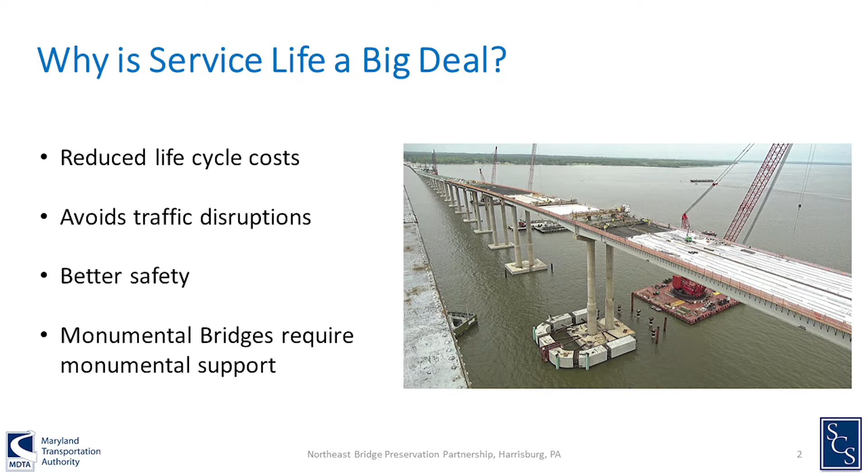So why is service life design a big deal? What are we talking about here? I think everybody recognizes that major rehabilitation and preservation projects often come with major impacts to the public and costs in terms of user costs. And ultimately, all of us should be focused on bridge safety. You know, when major incidents happen, what kind of negative reputational issues come with it. So designs focused on extending service life help us provide better conditions for longer, which ultimately gives us a greater degree of confidence in the safety of the assets.

One of the things we'll talk about in this presentation is what do you actually get when you design a bridge by code. Some folks may not realize what service life means in terms of their design. But given the amount of effort that often goes into designing monumental bridges, oftentimes they require monumental support, from elected officials and financing. So service life is a really important thing when you're talking about those really exceptional projects.

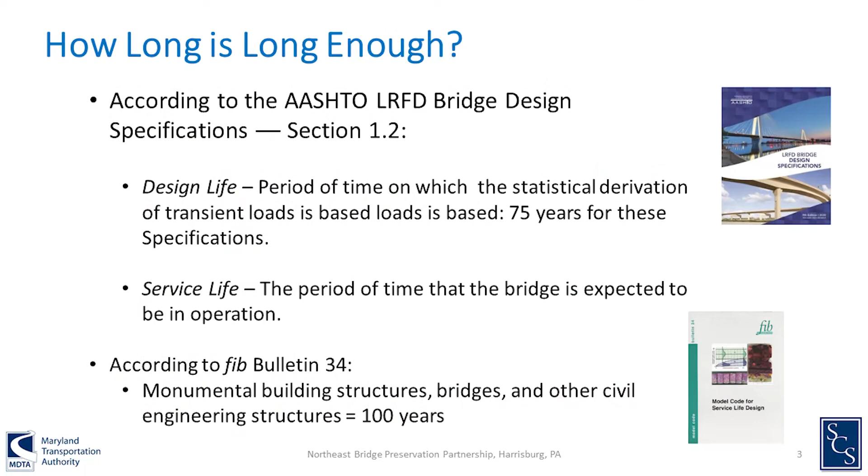So how long is long enough? A lot of times our presentation title initially was really focused on a 100-year service life. That's kind of a buzz term today. But the AASHTO LRFD code that most of us use has a 75-year design life. There's different terminology here: design life and service life. Design life is really the amount of time that the code says the loading used for this design will still apply.

It's not really a measure of durability. In terms of durability, that's where you get into service life, and there's not really a prescribed service life. Service life comes in different measurements. You can have a technical service life, which is when do you reach a point where your service is unacceptable - that could be cracking or delamination, whatever safety issue you have. You can have a functional service life where the traffic is too bad on the structure and it needs to be replaced because you can't live with that daily. And then an economical service life - do you have to make so many costly repairs and investments in a structure that it would really just be cheaper to replace it?

So service life design has a lot of different measures that are important to consider. I would say many folks, unless you put intentional thought into it, probably don't actually know what your actual service life is. What did we used to get? Anybody who designed with the AASHTO standard specifications may not realize it, but the design life, what the loads were designed for, was only 50 years. And the service life was really designed primarily around things like crack control and clear cover - those types of deemed-to-satisfy criteria in the code. So there was no specific service life requirement specified for bridge structures directly in the design.

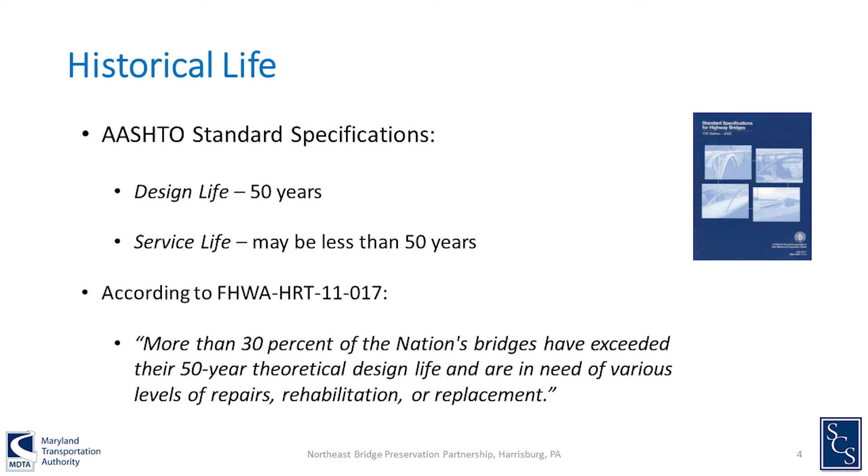Federal Highway has indicated that more than 30% of the bridges in the country have exceeded their theoretical design life, that 50-year measure. In terms of Maryland, I did at one point have a slide for the nation, but found that the data was very similar to Maryland. Ultimately, most of the bridges around the country were built around when the Federal Aid Highway Act passed, which was 66 years ago. So many bridges have already exceeded that theoretical 50-year mark.

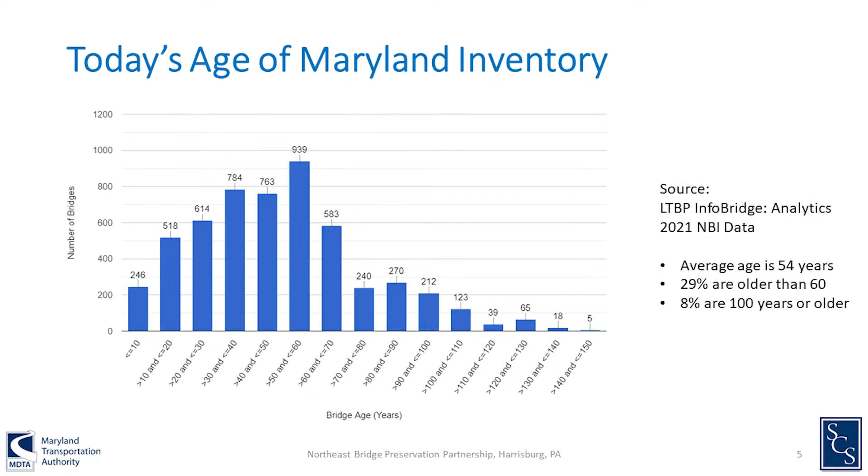And if you look at the age of bridge structures, most bridges do not make it to 100 years - most are 60 years or less. I noted that in my last slide, the average bridge age was 54 in Maryland, but you can also do certain treatments, and this aligns with deck replacements. We see from the NBIS, National Academy of Science, published some deterioration models on what you should typically expect in terms of decks.

You also see that 50-year number is pretty common—bridges will often have deck replacements in that 40 to 60-year time frame, most likely driven by using a standard design. Many bridge owners operate in a worst-first mentality, focusing on addressing their most critical condition-based needs, which drives them to large major rehabilitation projects.

But as we heard from earlier presentations today, making incremental investments over time is one strategy to extend the life of structures. You could also choose to do no preservation on a bridge, which tends to have the lowest service life—just a straight decline from good to fair to poor condition.

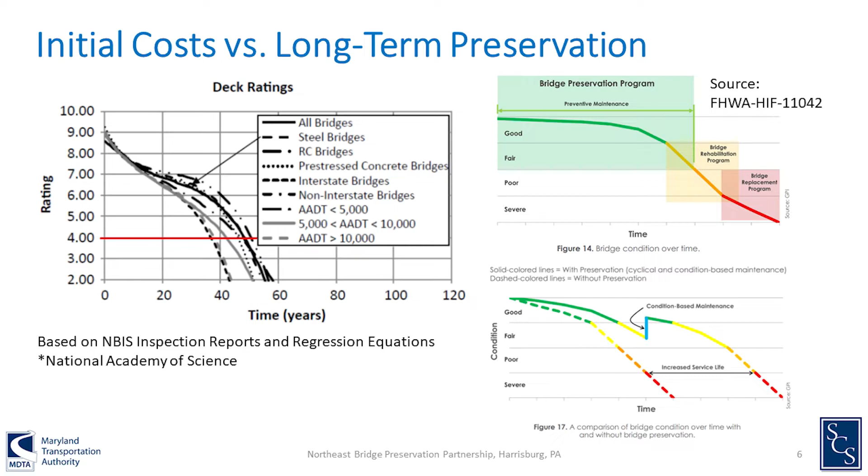But is there a way, using intelligent upfront design, to shift that curve—doing less preservation but making initial investments that allow for a longer service life without needing major condition-based investment down the road? If you look at design guides out there, there are really two major strategies to achieve service life design.

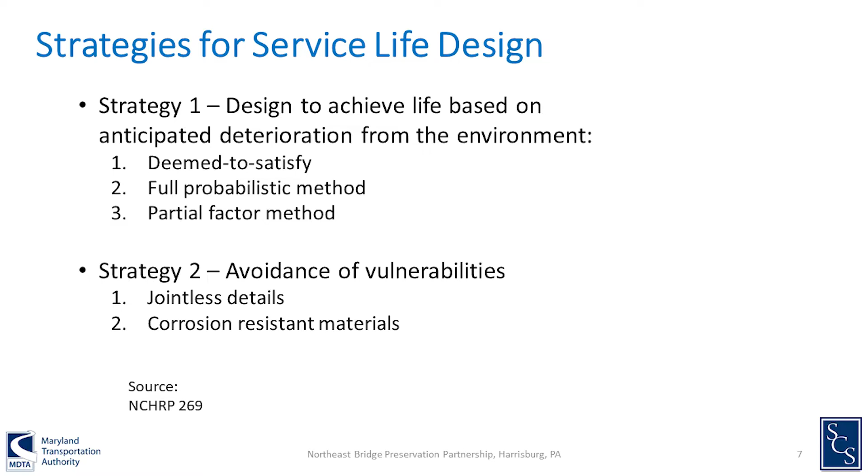One strategy is based on trying to avoid deterioration, set up with either a deemed-to-satisfy criteria—minimum covers and criteria in your design that allow you to avoid certain conditions—or a more tailored design for your specific conditions, which can be probabilistic or partially probabilistic.

Strategy two involves making heavier investments that give greater assurance you've avoided vulnerabilities. For example, you can pay upfront money to put in stainless steel reinforcing, and most studies show stainless steel reinforcing is inert enough that it typically lasts longer than 100 years. But it costs more.

So do you want to do that everywhere? Likewise, you can invest more in jointless details that are more costly but help completely separate your bearing lines and superstructure from drainage areas, helping you avoid that vulnerability entirely.

Do you want to make a lot of investment in having engineers design specifically for your conditions? Or do you want to get closer to that avoiding strategy, paying a little more in construction for greater assurances with materials?

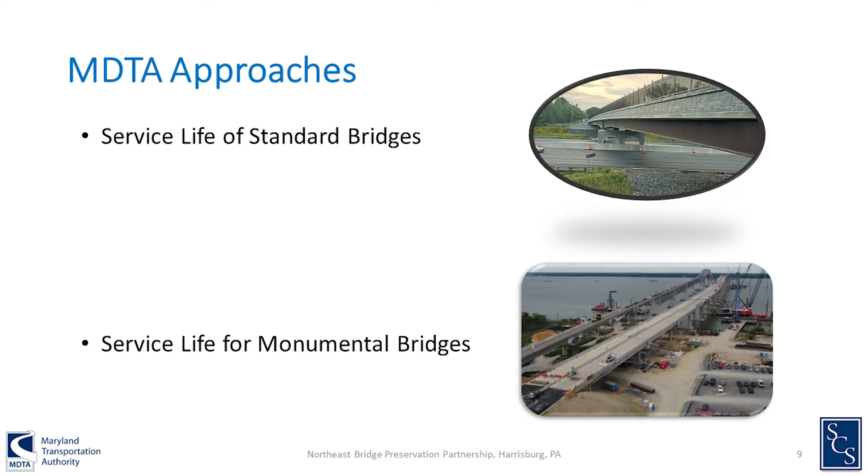One is focused on standard bridges—when you design by the code, you don't necessarily know what your service life is. What do we methodically get out of our standard bridge designs, and how do we do that in a way that minimizes our life cycle costs?

So it allows for some condition-based maintenance, but maybe not others that are more costly. Then our approach that is more project-specific applies to monumental bridge projects, where we allow for some deviations from the standards because of the magnitude of the cost to do that project.

Before I turn it over to Siva to get into the details of how SCS helped us do that service life analysis for standards, it's important to note that MDTA has historically used the MSHA standards for materials and construction, as well as the structural details and design guides. That's statewide—if you put out a project, you can do it quickly because a lot of our details are already prepared. We wanted to retain most of these.

We didn't want to get into having every project designed specifically for unique cases. We wanted to use some of those more avoiding strategies, but did not want to change our clear covers or change our materials across the board.

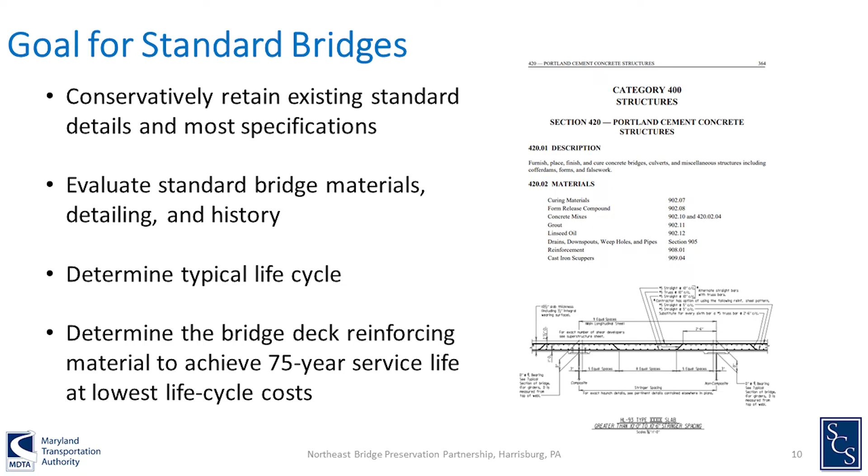And so we were really looking at what bridge deck reinforcing would assure us that 75-year design life while avoiding major condition-based life cycle actions that would really drive up the cost. So the goal for us is within that 75-year period, achieving that life with the minimum life cycle costs. With that, I'll turn it over to Siva to talk about the analysis that they did.

It's really important. Each of the owners have different goals in terms of how they want to approach the structure, how they want to maintain it, how they want to extend the service life, and what's the overall cost involved, and how complex is that going to be. Is that going to be possible within the resources that they have?

So one of the things we were looking at in this particular case, the owner, MDTA, was asking the question: hey Siva, we don't want to change our suppliers, and we don't want to change our mix, Mix 6 that we use for the deck. We really would like to know, based on the conditions and the salt we put on, and assuming we're getting the same mix, what other element can we change to extend the service life, and what's the life cycle cost for those different materials we can use? Can you give us an idea?

So what we did, we needed to get some idea of the total salt that they put on the road. And we need to get an idea of what the surface is going to be, what the rebar level is going to be, so we can calculate the diffusion aspects of things, particularly from surface chloride that we would know.

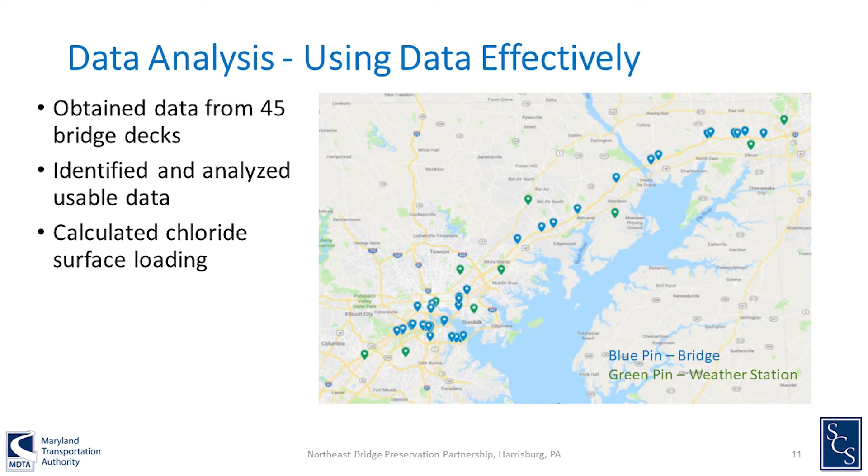Now, those are the blue dots you talk about—those are the bridge decks that we collected the samples from. And the green dots are the locations where we collected all the temperature, humidity, and a number of different things that we need for our probabilistic modeling of the service life.

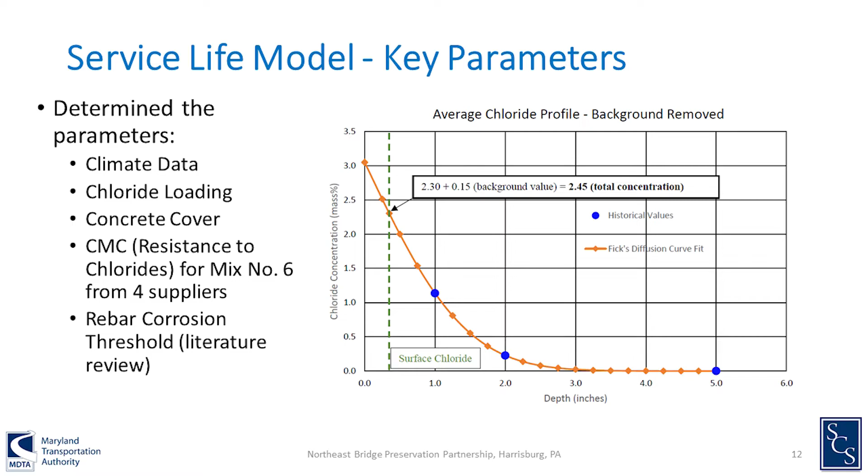So given that, once we collected the data, we collected chlorides at different depths, and then we fit that to a curve and projected that to a surface chloride level. So we have a good idea, overall, based on all of the chloride that they put on the roads, what the surface chloride is going to be, with a min-max range that we used.

And then we had different suppliers that were using Mix 6 within Maryland. Mix 6 is primarily used for the deck, and Mix 3 is used for the substructure. So we focused on Mix 6 because this is the deck. We collected samples from 4 different suppliers, as though they would submit to a bridge deck work, and used that to calculate what kind of chloride migration those particular concrete types would have.

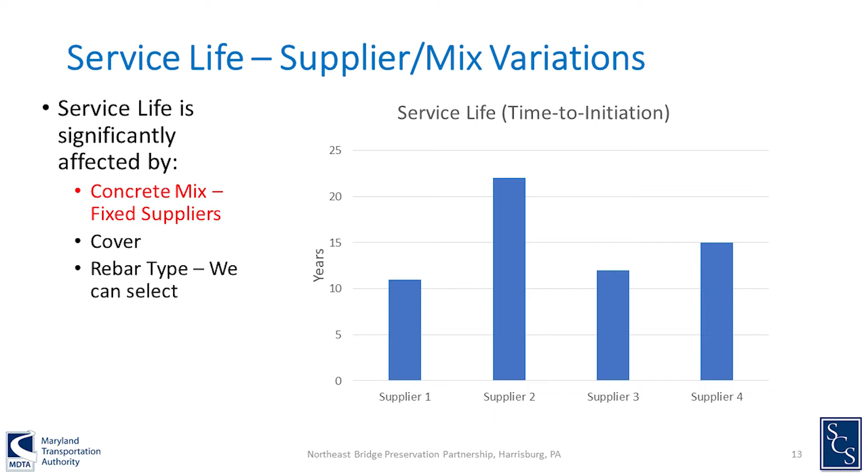You can see, based on those chloride migration coefficient values, when we run that through the system, the service life for black bar varies quite a bit from supplier 1 through 4, anywhere from 10 years to 23 years. So even though they're giving the same Mix 6, depending on what gets into the structure, you could have significant variation.

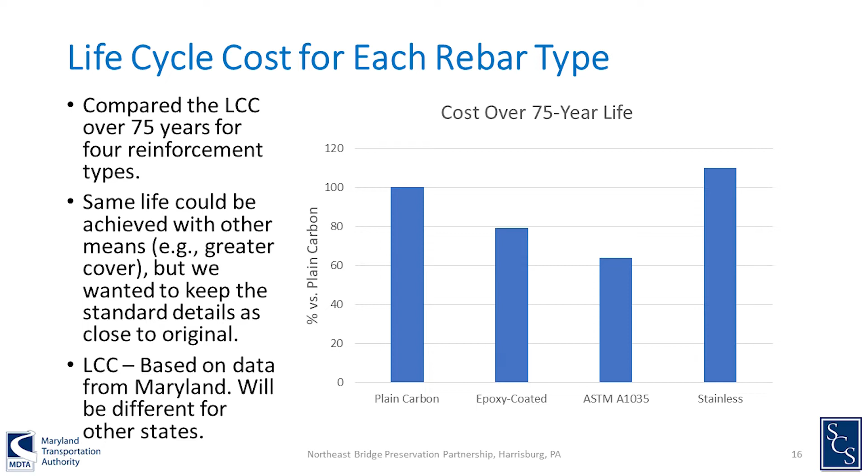In this case, as you can see, alloyed steel has the lowest life cycle cost. You could look at epoxy coated being another option from the cost perspective, and stainless steel is the highest cost, so to speak. Why is that? If it's going to give you 500 years, why is the higher cost? Because you can't count that to 500 years.

The design life is only 75. So you have to look at it from the aspect of: here's my design life, here's my service life, and what is going to control overall. So you're going to look at that, calculate the cost of that. You're going to keep that in mind. You can't build something unless it's going to be some kind of monument, right? That's a different way of analyzing.

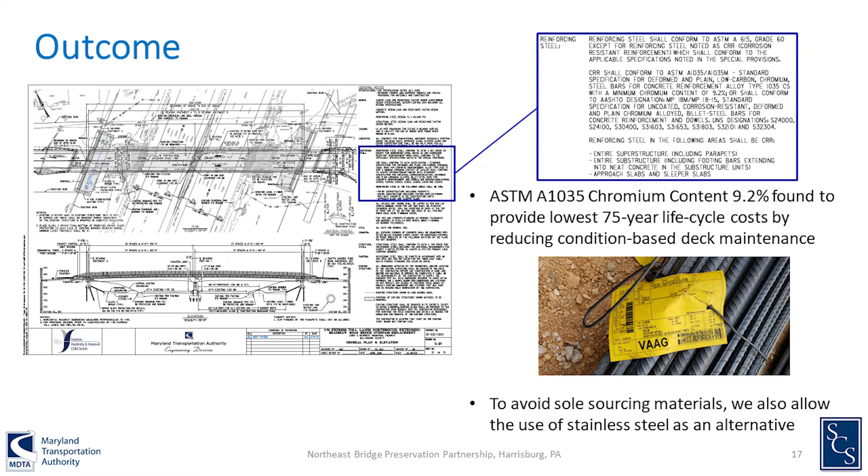So what was our outcome? In the end, we did update our notes and our general standards. The analysis found that the initial cost of stainless steel in a standard deck design was typically too high to offset the future maintenance costs. However, there are some opportunities with stainless - we'll talk about it a little further in the presentation - that some of the higher strength stainless can allow for customized deck designs. But again, for this specific analysis, we really didn't want to go to that customization. We were focused on standard bridge decks.

Ultimately, we did elect to update our standards to incorporate the ASTM A1035 chromium content 9.2%. That was found to provide the lowest life cycle cost through the analysis, as Siva mentioned. And it's important to note why did it cost less? Well, it does have a little bit of a premium in terms of initial cost. However, based on the analysis, we were expecting that plain black bar and epoxy coated rebar would both require major condition-based rehabilitation through the life of the deck within 75 years, whereas this ASTM steel, the chromium content steel, was able to have that longer life, and we anticipate will avoid that rehabilitation.

So now let's talk about a couple monumental bridge examples where we are willing to make a little bit more effort into the design analysis so that it can be more customized for that bridge.

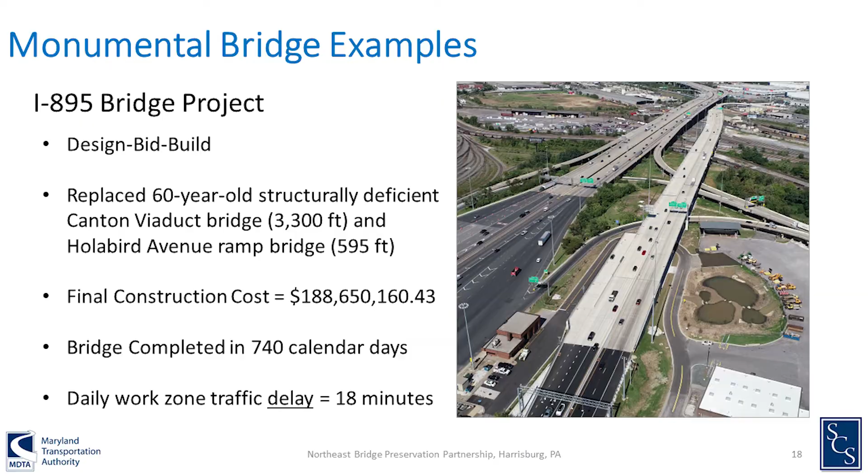We had a design bid build project on our Interstate 895 in Maryland. It was replacing a 60-year-old structurally deficient bridge, 3,300 feet long, and an attaching Holabird Avenue ramp that was almost 600 feet - a $189 million project, roughly 2 years. This project was anticipated to induce, and actually did induce, roughly 18-minute delays every day from the reduced lanes we had during construction. And that's not just the normal delay - that's how much delay we added to people's lives from this construction project.

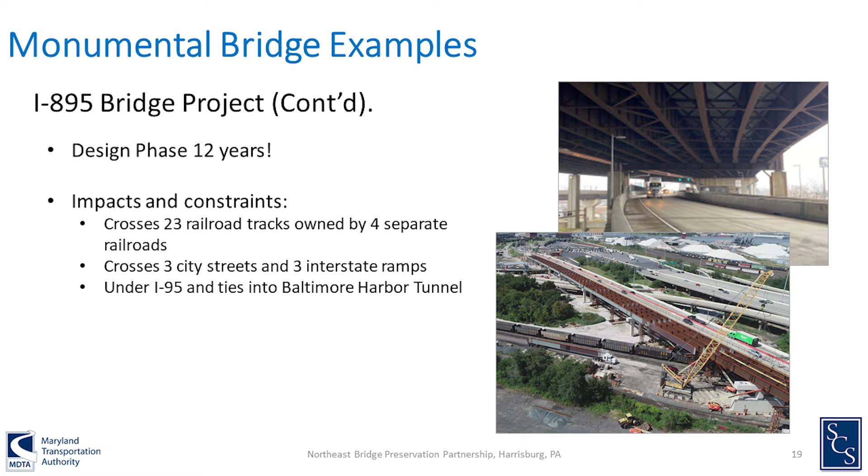Because of the magnitude of the traffic impacts and the different costs for the options, it took us 12 years to get the political support to actually have a design that could be supported to move forward. We ended up actually doing a second project to add lanes on I-95 that helped to supplement to get us down to that 18 minutes. So it was an enormous effort just to get this project embraced from the start.

It was astronomically difficult in terms of crossing 23 railroad tracks owned by 4 separate railroad companies, 3 Baltimore City streets, 3 interstate ramps, and going underneath I-95 and into the Baltimore Harbor Tunnel. So we were constrained vertically, horizontally, you name it, this bridge was just a nightmare.

One thing that we knew, we did not want to come back here. Once we replace it, we wanted to get in and get out and not interfere with people's lives again. We were not adding capacity because we weren't able to widen given the footprint of the railroad tracks, and the amount of property that we owned wasn't really appropriate.

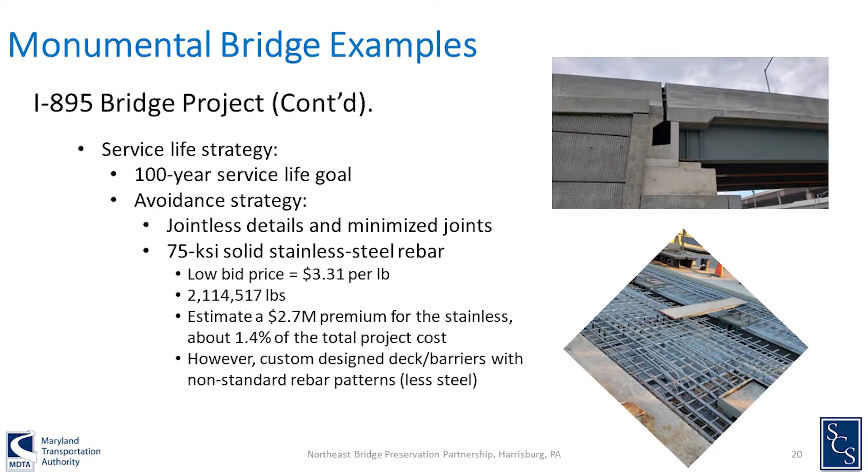One of the things we were able to do with the project is leverage — we ended up using solid stainless steel, and we did have a customized deck design. Based on the cost of the job, we estimate that it was over $3 a pound for that stainless steel, which added roughly 1.4% to the cost of the overall project.

However, we never had the pricing of epoxy-coated rebar using a standard design to compare against the additional pounds of steel for that design versus this design. So we do know we had some cost savings from that customized deck that's not considered here, but the emphasis of what we're trying to show is that there are additional costs with solid stainless.

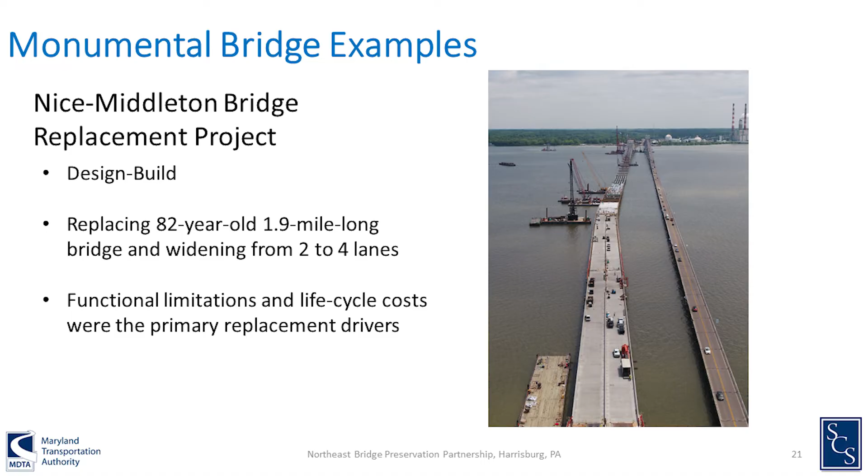Another monumental bridge project ongoing right now is a design-build project in southern Maryland. It's replacing an 82-year-old, 1.9 mile bridge over the Potomac River. I talked about the different reasons that drive service life — this one is being replaced due to the functional service life being eroded and the life cycle costs.

We are approaching the need to do a major deck rehabilitation on the existing bridge. The costs and the traffic impacts on an already difficult location drove us towards that replacement option.

In this project, being design-build, we allowed both for a performance-based contract and for alternative technical concepts, where the contractor could present their own ideas for how to achieve our overall goals. The MDTA board, because of the magnitude of this project, did weigh in specifically on what our goals should be, including the service life that we should have for the bridge.

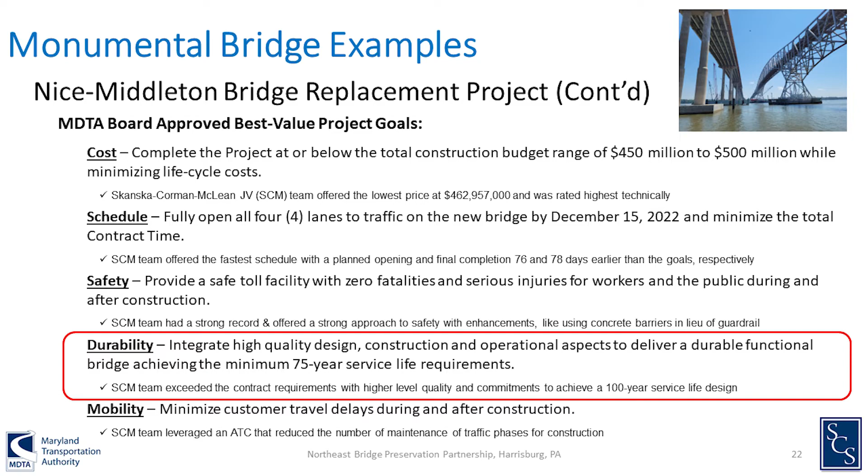They requested that we achieve 75 years, with the expectation that the service life would likely be driven by functional requirements and not durability needs. Even though we had that durability goal of 75 years in the contract, our contractor, Skanska Corman McLean, in their proposal offered a 100-year design as part of their best value solution, and they were ultimately selected.

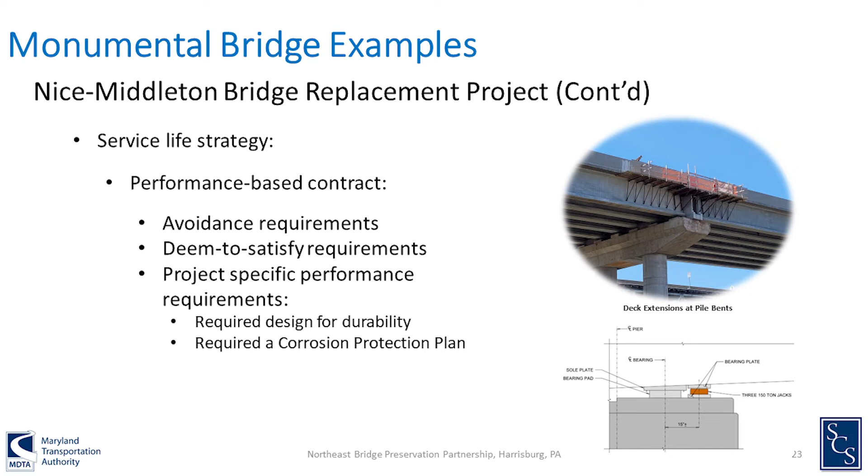The performance-based contract had a number of tiers of provisions in it, and we had some avoidance requirements, like having jointless details — you can see on the screen the pier cap has that same kind of deck extension that keeps any drainage away from the bearing line. We also required some project-specific performance requirements, like being able to jack the bearings to do bearing replacements and the like.

And I'm going to turn it over to Siva to talk about how we actually achieve these with the contractor.

So whenever you're designing a new structure, one of your goals is to say: in the design phase, we can incorporate materials and systems in such a way that this will achieve a service life of 100 years, which is the same as the design life. So Will was talking about some of the deemed-to-satisfy items, where you have those drainage details, joint details, and things like that.

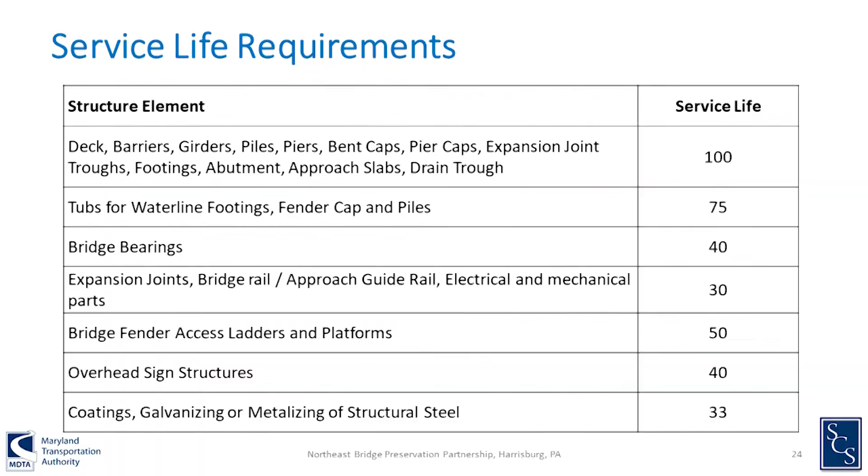But we also look at what's going to happen to different parts of the deck, as you can see, different parts of the structure. You've got a lot of different variables here — deck, barriers, piles, and piers are all 100-year service life, and the tubs that hold the footers are about 75-year service life.

Bearings, expansion joints—they all have different service life requirements. One of the goals of this project is to have a corrosion protection plan developed in the design phase so owners can see how contractors will achieve the required service life. Our goal is to work with contractors to develop those plans and have them accepted by the owner before construction proceeds.

So that's what we did—identified all the replaceable and non-replaceable elements, the requirements for each, and tried to figure out how we're going to achieve the service life. I'm going to share some of those things with you.

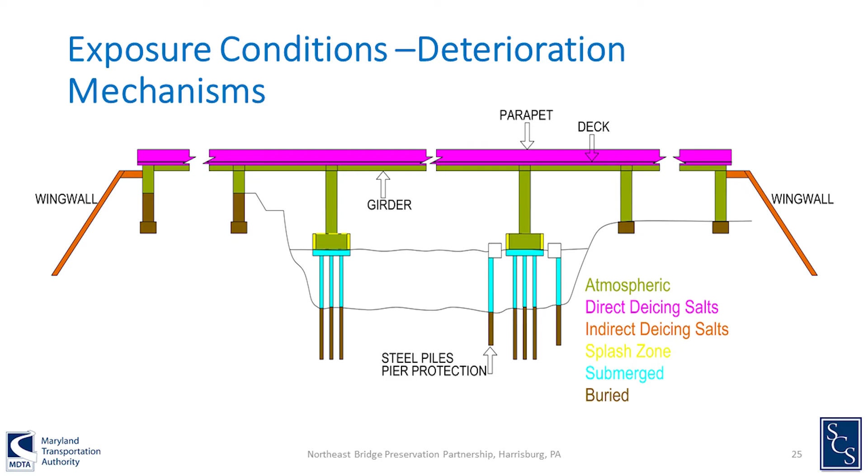Your deck and parapets are exposed to de-icing, and one side of the parapet is directly exposed while the other is not. Any overhead sign structure is exposed to spray, while underneath the deck, the superstructure and substructure above water are only exposed to the atmosphere. Down close to the water, you're talking about splash zone, submerged, and buried conditions—lots of different variables.

Even in a simple structure like this, different elements have different exposures and need to be addressed differently. Having a plan ahead of time to clearly communicate—whether it's pre-stressed piles, a regular concrete footer exposed to splash zone, a regular concrete deck, or a post-tension box girder—whatever you have in the plan, you have to reflect those and address how you're going to get 100-year service life. That's where we ended up going with the analysis.

One of the key things we have to achieve for 100-year service life is identifying that the piles are exposed to almost three different environments on the same pile. So which one is the controlling one? We have to identify which has the least service life—that's the controlling one. Which splash zone is going to cause the most severe corrosion?

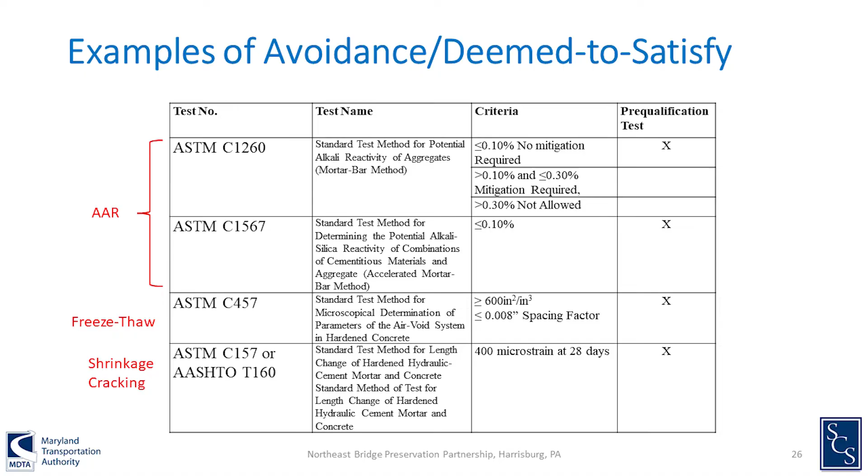Some of the other things we have to address: what if you have an ASR issue? What if you have a freeze-thaw issue? How do you address that early in the process so we don't have those issues when the structure is actually built? We identified a number of tests that the contractor has to run on a given approved mix that must pass before they can use that mix in the structure.

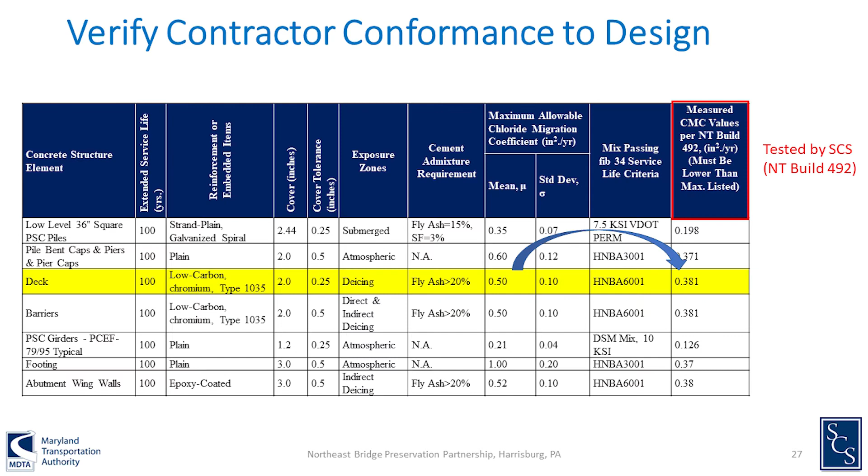As you can see here, we identified all the different elements—piles, footers, deck, barriers—and the maximum allowable chloride migration coefficient that the analysis would allow. Then we collected samples of the actual mixes the contractor was going to use and tested them in our lab to find the chloride migration, shown on the last column here—that migration should be less than the maximum allowed.

Every time they put a mix together, we made sure it had an acceptable chloride migration coefficient so you'd get the performance you're looking for over 75 or 100-year service life. I think that's a good way to not only design something, but make sure you're also getting it in the field. It's a full circular process: you analyze, get your numbers as a maximum, then test to make sure what's going into the structure will meet or exceed that service life.

And then what happens when you go into the structure—sometimes this tub we're talking about has a 75-year service life.

They use stainless steel for that, so they don't have to worry about it. Of course, they're pouring concrete into this, the regular concrete, regular steel. And so what happens when the tub is fitted into the pile, it wasn't a perfect fit, concrete to concrete. You all expect that. Most of the time it's okay, sometimes not. And so water started coming in.

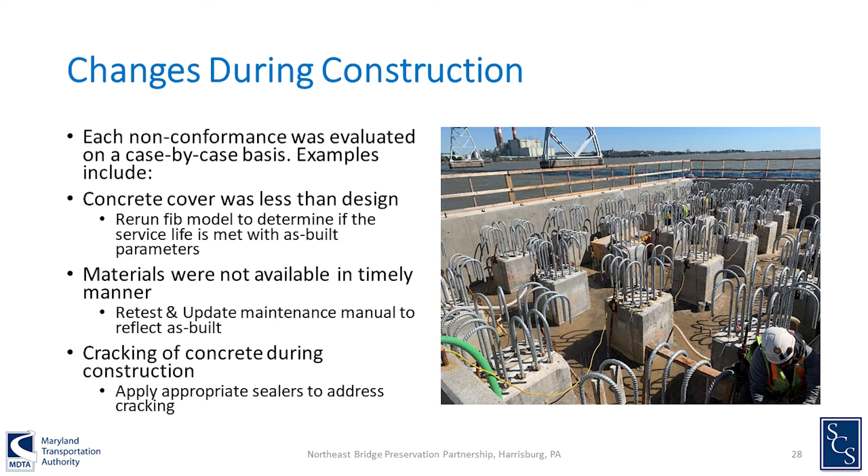How is that going to affect the service life? Water is brackish water, how long it stayed. When we did the analysis, we were able to say, yeah, that's not going to affect your service life. But these kinds of things happen in the structure in the real world. A cracking occurs on a pile. Is that going to affect your service life? What do you have to do to bring that service life back to where you need it?

And so I'm going to turn it over to Will to close it out. So in conclusion, as I mentioned a couple times, today's code provides for a 75-year design life, but does not lead to designs that may align specifically with your goals.

At MDTA, we had the goal of trying to minimize life cycle costs, and we needed to do the analysis to prove that. There is some effort that goes into that, but really what we're advocating here is that you actually know what you're getting. A lot of owners will make the investment and focus on having good detailing and good standard details, which often are an avoidance strategy, but may not necessarily mean that you get the outcome you think you're getting when you look at what you're actually getting from your suppliers, what are the actual clear covers, and what your design leads to in terms of service life.

We do recommend that you evaluate your service life position, and that includes those larger performance-based contracts where it's expected that you create flexibility for innovation with a contractor on larger jobs to try to save money. But it's important that you say what you want. Even though we are doing performance-based contracts, if you know as an owner that you want something, don't leave a contractor guessing on that. Specify exactly the areas where you want to avoid issues or where you have deemed-to-satisfy criteria that they must meet. And that actually creates more of a level bidding field in projects.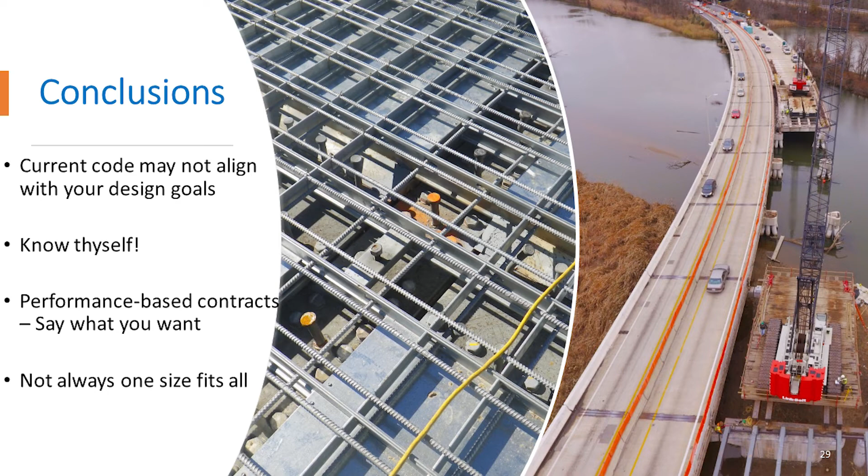In conclusion, one of the things we tried to show with both standard designs and performance-based contracts is that good engineering and practical designing is still better than just being decisive, right? As owners, a lot of times we like to make quick, good decisions and feel solid about it, and that's great. But at the same time, there are certain instances where you just need to do the analysis and know what your decision actually means.

I look at the example on the bridge as a special case. We actually used a galvanized grid deck on one of our bridges over a river, and the reason for that was we needed to upgrade our barriers to MASH-compliant barriers through the rehabilitation process. It couldn't handle the extra loading, so there again we migrated away from a standard design.

So with that, I am happy, if time permits, Rod, I'm happy to take any questions. Siva and I.

Yeah, we have standard specifications that provide a standard mix design, but the specific contents of the mix deviate just enough within the thresholds that it had a significant impact on the analysis and what service life we were projecting. I'll let Siva comment on that further.

Well, one of the things is, in a concrete mix design, you may say you want this much cement, this much aggregate, this much sand, and this much water, and any admixture that you have. You could say that. But we never say anything about temperature, how much you have to mix, how long you mix, when did you put it, what kind of water they added before they put it down, what kind of water they used to finish. A lot of things go into that.